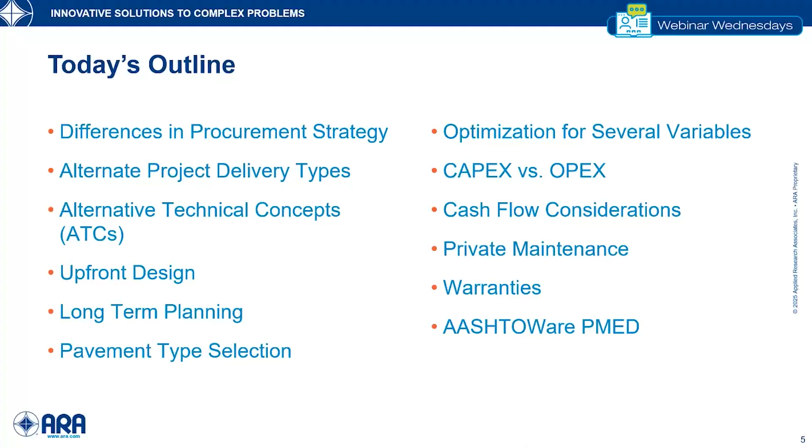We'll talk about the differences between CapEx and OpEx, or capital expenditures and operational expenditures. We'll talk through, related somewhat to CapEx and OpEx, cash flow considerations, privatized maintenance, warranties, and finally a couple of slides discussing and describing AASHTOWare's Pavement ME design software and how it can be used to help in these alternate delivery project type solutions. So here we go.

Key differences really between design bid build and alternate delivery, and that's kind of where we start. Key difference really is that the general contractor involvement happens a lot sooner in an alternate delivery environment. Traditionally, design bid build has been the mode that most DOTs have worked in. The risk is primarily sitting with that owner agency in the design bid build environment.

It follows those proven specifications and procedures, really encourages innovation through low bid procurement. So there is still innovation in design bid build. Our contractors are always looking for ways to deliver projects as competitively as they can. And so they are incentivized basically to do that through low bid procurement.

In alternative delivery, you get more opportunities for collaboration between the designers and the contractors, and really even the owner agencies. The risk can be shifted to the contractor. This can be sold as a benefit to taxpayers because the owner agency may not have to be responsible for something later down the road. Of course, that risk does translate to pricing, of course.

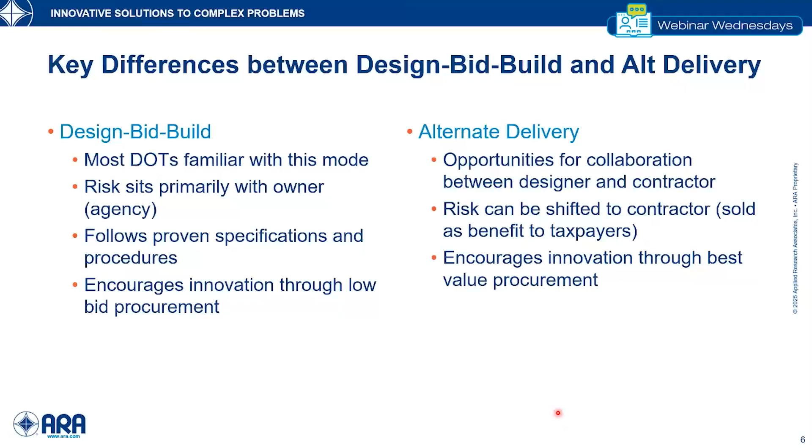And it encourages innovation through the best value procurement. So not only low bid, but better schedule, better availability potentially, innovative financing opportunities. There's a host of other benefits to those alternate delivery types.

And so there are many alternate project delivery types. Starting out with probably one of the more basic ones, just considered design build. But then more recently, we've seen the advent and increase in uptake in progressive design build, which I personally have enjoyed a lot because that particular project delivery type has your contractor-designer team selected based on qualifications, with much earlier interaction and really a teaming environment with the owner agency.

Public-private partnerships, where we start to see some private financing enter the picture. Then there's design-build-operate-maintain, and design-build-finance-operate-maintain—permutations of design-build and P3s. And then construction manager general contractor, construction manager at risk, and bridge and project bundling.

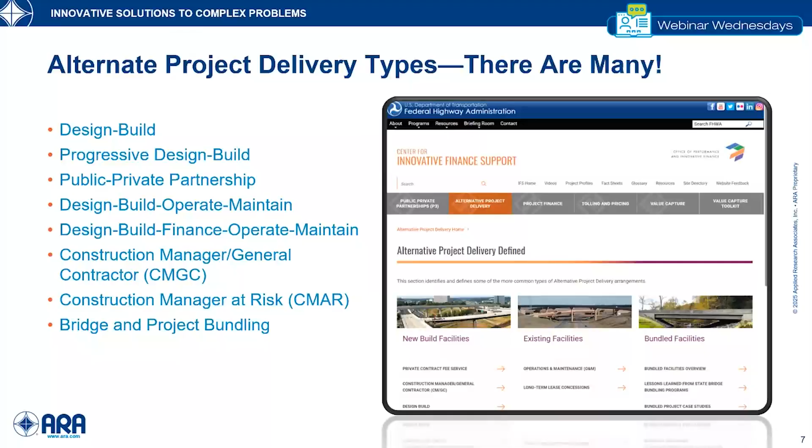As Shri mentioned during the intro, this is an evolving area with many agencies trying to come up with the best solutions for procurement for infrastructure delivery. We may see many more types of alternate project delivery in the future. I wholeheartedly agree that the FHWA Center for Innovative Finance Support is a great resource to provide definition and context for each of the alternate project delivery types, and will likely keep up with new ones added over time.

Next topic for today is the discussion on alternative technical concepts, or ATCs. I've personally found these to be a lot of fun in my career, and it's really one of the best opportunities for innovation. It is the idea of a concept offered by the competing team, delivering equal or better quality of finished product, and those ATCs are considered confidential.

They're one-on-one, submitted to and discussed with an owner agency. An owner agency can accept them with modifications, or reject them outright. One real benefit, which some competing teams may not enjoy, is that all ATCs become available to whoever is ultimately selected and awarded the project. So one team can't submit an idea that's approved for them but left on the cutting room floor if they're not selected. The owner agency benefits from all ATCs submitted and approved, getting the best of what all the contracting teams were trying to offer.

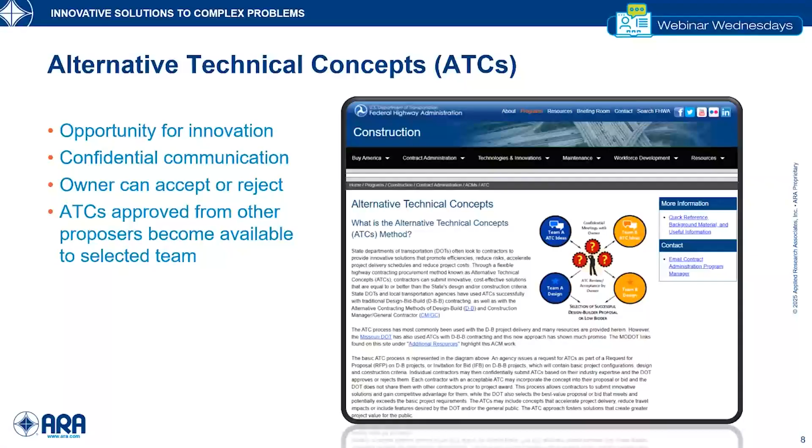I will say each agency offers these types of ground rules early in their procurement processes, and they are ever-evolving. This is a dynamic industry, and changes in specifications and best practices are constantly taking place. So it's good to be mindful of what the ground rules are.

Here's an example of an ATC process that I personally went through. I'm going to be scattering some examples throughout this briefing and webinar today of things I've encountered in my career, to demonstrate some interesting things that have come along.

The top left table represents a structural number calculation associated with an asphalt pavement design for a road in Tennessee, considered the base design. The ATC that a project team developed was attempting to remove the requirement for including a cement treated base in the pavement design, and instead take advantage of more of the in-place materials, substituting a lime stabilized soil to provide more support for that pavement section.

Back to the concept, ATCs must answer this question: does the concept deliver equal or better quality of finished product? This example shows how the contractor innovated to use as much in-situ base material as possible. The base design called for removal of an existing concrete pavement and underlying granular base material, replacing it with 8 inches of new aggregate base, of which the top 4 inches would be cement treated. The design-build team proposed the ATC to instead windrow the existing aggregate base material, lime stabilize the underlying subgrade soil, and replace the aggregate in place.

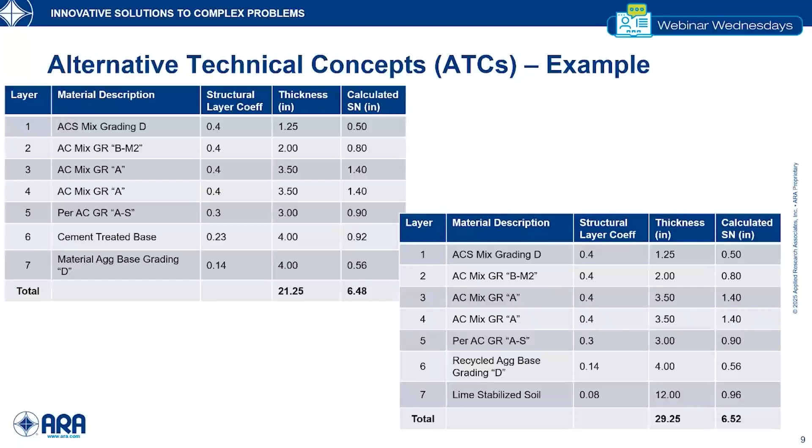And the solution would reduce haul off and import of material and provided a higher final structural number than the base design. So, just an example of ways to innovate with pavement design through the ATC process.

Upfront or base design is really where all these projects start. It truly does depend on the alternate delivery procurement at hand as to how far along the design is when it's handed over to the competition teams. In progressive design build, it may only go as far as about 10% concept design, because progressive design build is intended to be a partnership between the owner agency and the contractor joint venture team. In a traditional design build, it may go all the way out to 30% design. In P3s, it can vary wildly from low percentage upfront concept designs all the way to more finished designs, anywhere in between.

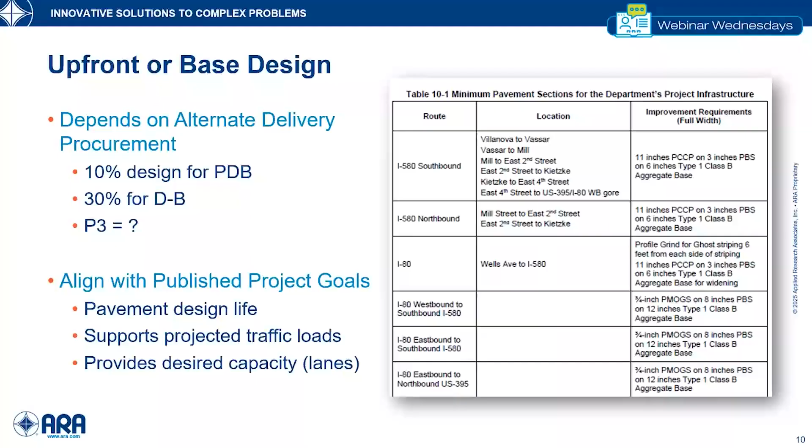But those base designs really do align with the published project goals. They will describe and declare the desired pavement design life, show and highlight how they can support the projected traffic loads, and provide the desired capacity, typically described as number of lanes for that project. The table shown here is an example from the Spaghetti Bowl Express interchange in Nevada, showing the different routes and road segments and what is intended with the base design for each. Performance criteria can be established, and depending on pavement type, there are opportunities to define what those performance criteria are.

If an initial design is not specified, an agency can instead develop performance criteria against which alternate designs are compared. So rather than specifying a jointed plain concrete pavement for an infrastructure project, they can allow pursuit teams to offer their best solutions for pavement type and performance, with guidance on the performance criteria that each pavement type would need to meet over the performance period of the project.

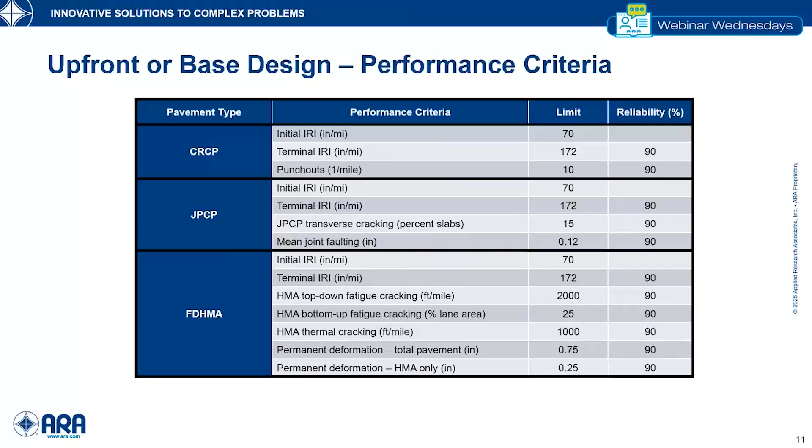Oftentimes with upfront and base design, one of the biggest questions is to understand what is already there. Very few opportunities exist for greenfield design. Most projects are considered brownfield, meaning there is existing infrastructure of some sort of pavement already there, which typically needs to be increased in capacity or moved or realigned slightly to accommodate geometry changes associated with the increase in capacity, or what have you.

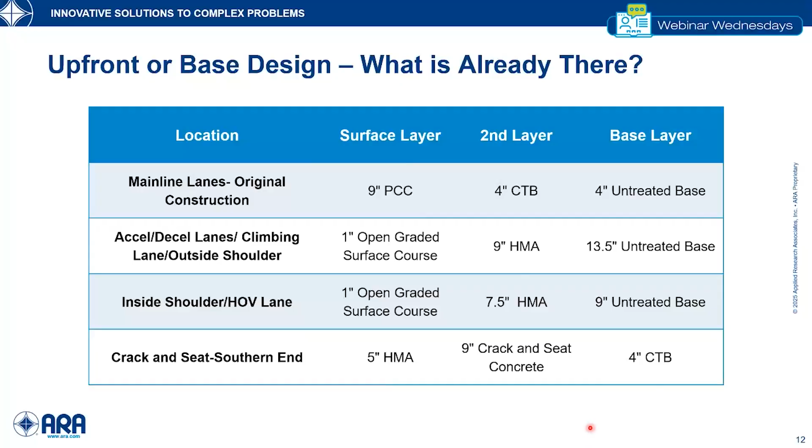Falling weight deflectometers and heavyweight deflectometers for understanding structural capacity measurements and structural integrity. The LCMS and 3D laser-based digital survey vehicles for collecting distress information, and right-of-way camera imagery for understanding how the roadway fits into the overall geometry of the corridor. High-speed profilers measuring the smoothness of the roadway, be it concrete or asphalt.

Friction testing devices help us understand the frictional characteristics of current surfaces. Many of these projects do require resurfacing, but it's good to understand the frictional characteristics of the existing pavement and materials to have a good sense of how that may project into the future with a new surface.

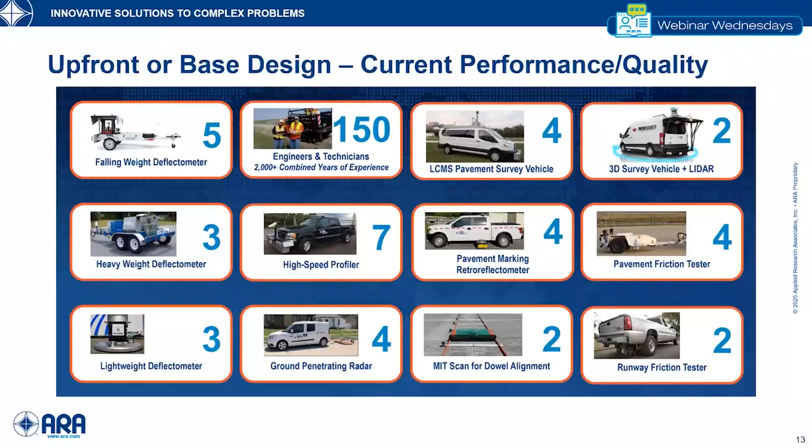There's a host of ways to do non-destructive testing to gain data and information on what is currently there, and data helps drive great decisions. We absolutely need to understand the best we can what is there today to best project how we can work with it and make something valuable for the future.

In this case, a level 1 design exception where the proposed mainline inside shoulder is less than 12 feet wide, which did not meet their original requirement, and a level 2 exception, how the existing equivalent length of grade exceeds the critical length of grade between two of the cross streets.

This informs the pursuit teams on design exceptions that are currently present, offering them opportunities to potentially solve those challenges, to remove the design exceptions, or to pursue further with the exceptions, and describe how the ultimate infrastructure alignment and design will still provide a safe travel environment, not missing out on the opportunity to keep it safe.

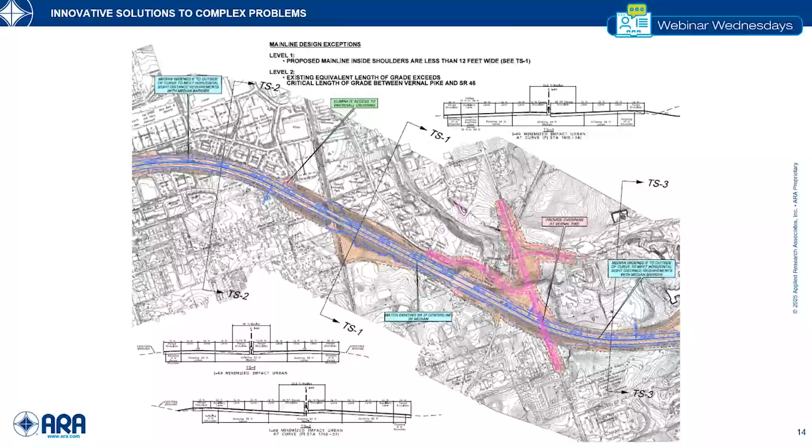Now we'll talk a little bit about long-term planning. When you embark on an infrastructure procurement project, it is always good to have the long term in mind: where is this project today, and how are we making it better for the future?

So what is the design life for that project? Specifically with regard to pavement, that can be declared to be 20 years, 30 years, 50 years, depending on the type of procurement and the ultimate goals of the owner agency.

How much traffic is it going to support? Are there multi-use corridors being incorporated as part of that design? Sometimes there's right-of-way planned for public transit, be it bus or even rail systems. Sometimes bike lanes are being considered as part of the corridor enhancements. And then revenue projections, if that is part of a public-private partnership opportunity.

Specifically with regard to pavements, talking about long-term planning, what is the ultimate desired capacity for a project? What kind of lane availability will ultimately be there, and what liquidated damages may be applied if lanes are not available for whatever reason.

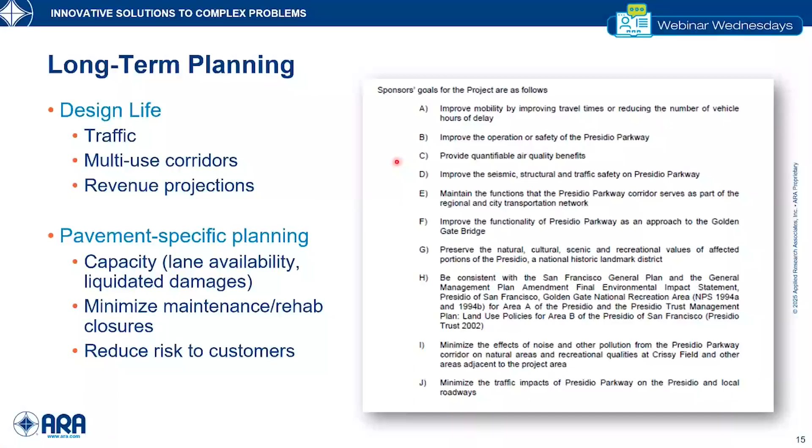The example list of sponsor goals shown here is from the Presidio Parkway design, build, finance, operate, maintain project from several years ago in San Francisco, where you can see a description of the high-level goals for the project: improving mobility, improving operational safety, and quantifiable air quality benefits. There's a number of ways to describe the long-term goals of the project.

So after the operation and maintenance period that the private concessionaire would undertake, there would be at least 10 years before the owner agency would need to do something to restore service life to the pavement. So in order to ensure at least a minimum of 10-year residual life, there was a requirement for inspections to take place, including up into the handback timeframe.

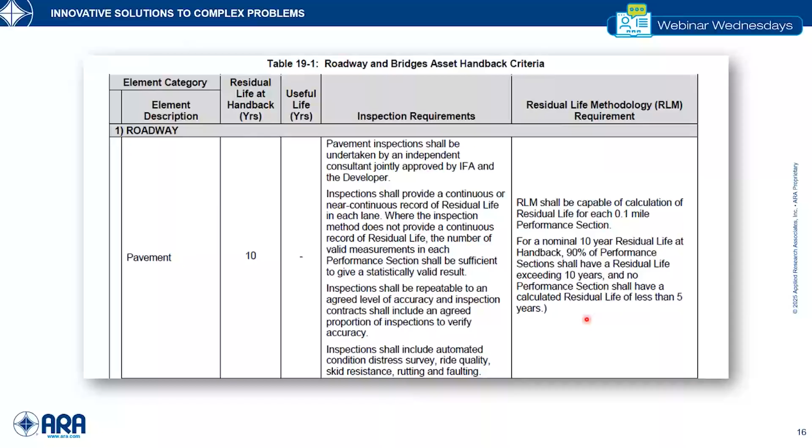So this is something that all of these pursuits really take into account, that exchange of risk for financing. All right, now we're going to move into pavement type selection.

This can be a hot topic associated with the continued great competition between our really two primary pavement industries, being concrete and asphalt pavements. How do we get to the appropriate or best fit pavement type for a project?

This process is often done in concert with a life cycle cost analysis, but may include other factors. NCHRP Report 703, the Guide for Pavement Type Selection, really does a great job of mapping the process for selecting the pavement type for a project.

It goes through these major steps: the identification of feasible alternatives. You may reduce or eliminate some alternatives because they're deemed not feasible for one reason or another. Then you develop pavement life cycle strategies and get into a life cycle cost analysis of those strategies. If there are economic or non-economic factors, they can be evaluated and weighed accordingly.

Then an agency-based selection of preferred pavement type can be done, ultimately moved to the design bid build preferred pavement type. That is the typical or traditional agency-based pavement type selection process that results in a design bid build procurement. The alternate delivery process can intercept this process to allow for different pavement types to be chosen based on the results of this selection process.

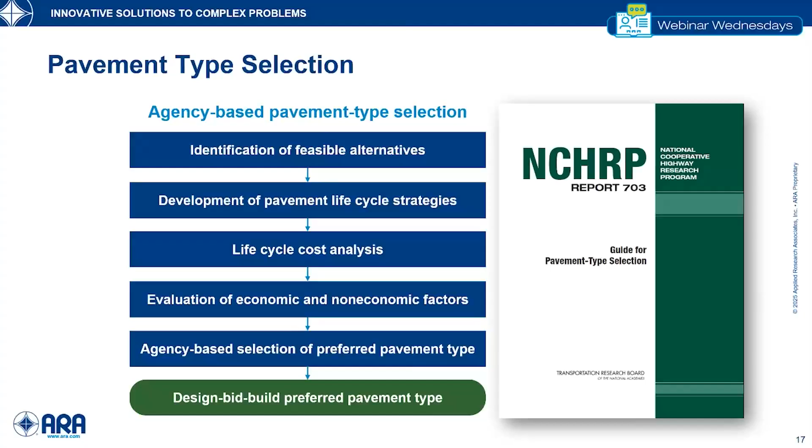If you do have non-economic factors, one way you can work that into the pavement type selection process is with the establishment of grade cards. Really, that's nothing more than, think of your grade report card you would get going to school. Each criterion would get a letter grade.

In the example I'm going to walk through, this is from the Illinois Tollway procurement of one of their main corridors, where they underwent a pavement type selection process that included both economic and non-economic factors. These were the factors being considered: the initial or upfront construction cost, the ongoing maintenance cost, a green or recycling factor associated with each of the pavement types, and a constructability and schedule factor.

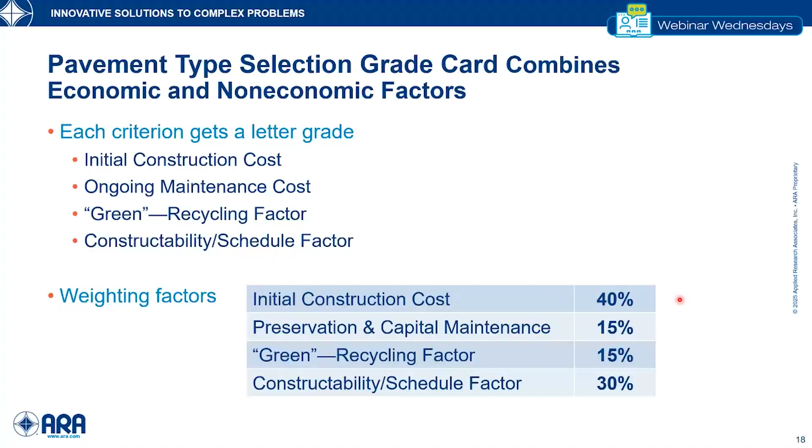The weighting factors associated with each of those criteria were determined through a panel of Illinois Tollway specialists and staff, to describe what was most important to them for the ultimate, long-term goals of the project.

So when the pavement type selection was completed, the 5 options for pavement types are shown across each of the 4 main criteria we just described: construction costs, capital preservation (also considered operations and maintenance cost), a green or recycling component, and a constructability and schedule factor.

Each of the pavement types had positives and negatives associated with different aspects of their construction. You can see where an A was given to the lowest construction cost associated with upfront costs. In this case, full depth asphalt worked out to be the lowest upfront.

In capital preservation, an A grade was given to the lowest long-term preservation cost, and that was deemed to be continuously reinforced concrete. On the green side, an A grade was given to the greenest alternative, based on criteria associated with the reuse of existing pavement or amount of recycling permitted. This grade was a consensus from the engineering group with the tollway.

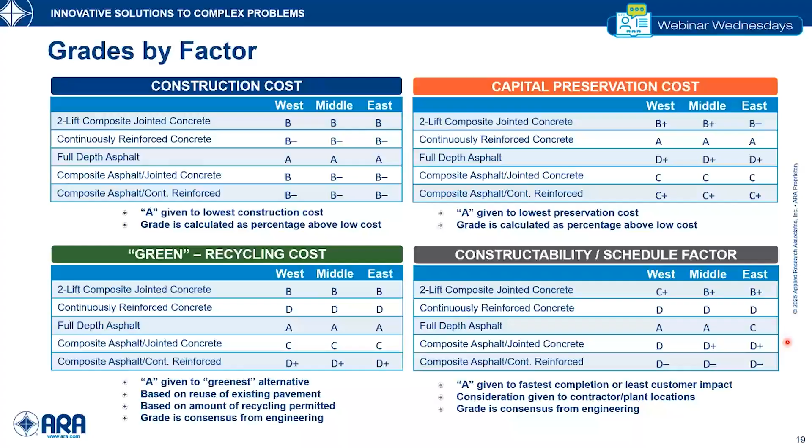Then there's the constructability and schedule factor: how quickly could the project be delivered? The west, middle, and east are portions of the corridor that was ultimately being constructed, so there were different challenges associated with geography along the corridor. You can see where the schedule was challenging on the eastern end of the project, which had to do with the forecast of where asphalt could or may not be efficiently delivered to a project, and you can see where the letter grade had changed there. That was an interesting experience to go through with that pavement type selection.

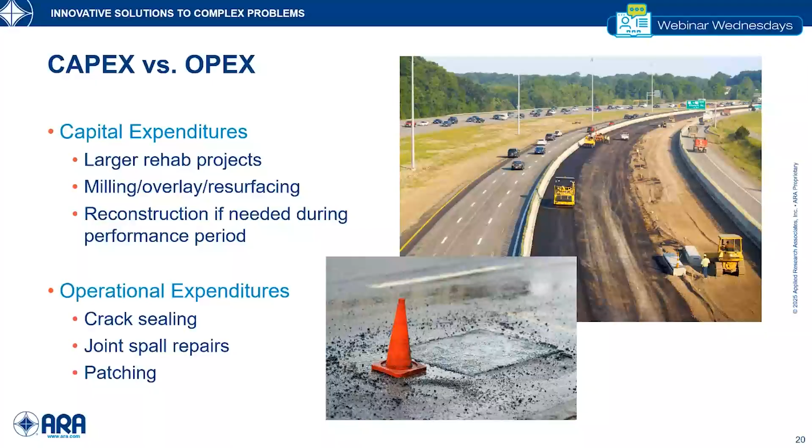We'll move now to a discussion between CapEx and OpEx. Capital expenditures are your larger rehabilitation projects: milling, overlay, resurfacing, reconstruction if needed during the performance period. Depending on the length of time your pavement is expected to be performing, you may or may not encounter the need to reconstruct it. Operational expenditures are more of your annual type repair strategies, like smaller items such as crack sealing, joint spall repairs, or small patching quantities.

So there are cash flow considerations associated with that, especially for P3 and toll facilities. In these cases, especially with P3s, the upfront bid is the high bid. Contrary to typical procurement where low bid is considered the winning option, in the case of P3s, owner agencies are looking for the most return on their investment, and therefore the highest upfront bid is selected. So the P3, in turn, would like to defer expenditures to recover that upfront cash outlay. If you think about putting up a lot of money up front, you'd really like some time before having to put additional money into reinforcing or supporting that infrastructure. So how can the pavement designs accommodate that strategy?

You look for pavement solutions that have a lower CapEx upfront, so potentially doing work right at the beginning or just before the project were to take place, or how do you defer for some amount of time, still maintaining the performance requirements associated with that pavement, but gearing up really in recapturing cash flow to be ready for more construction to take place after the first, say, 10 years of that procurement timeframe.

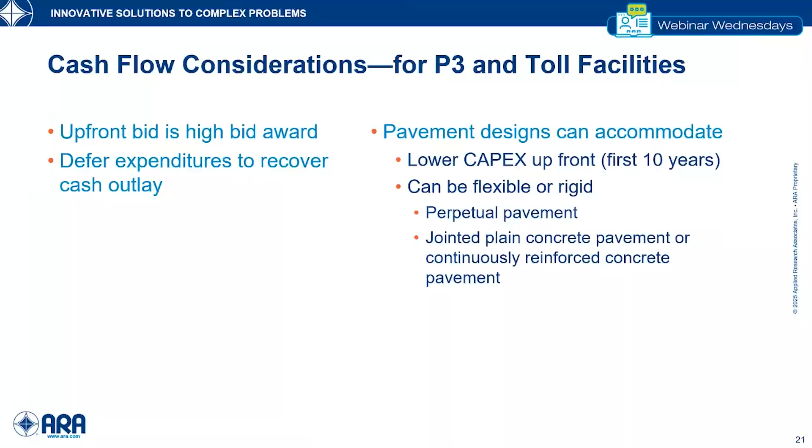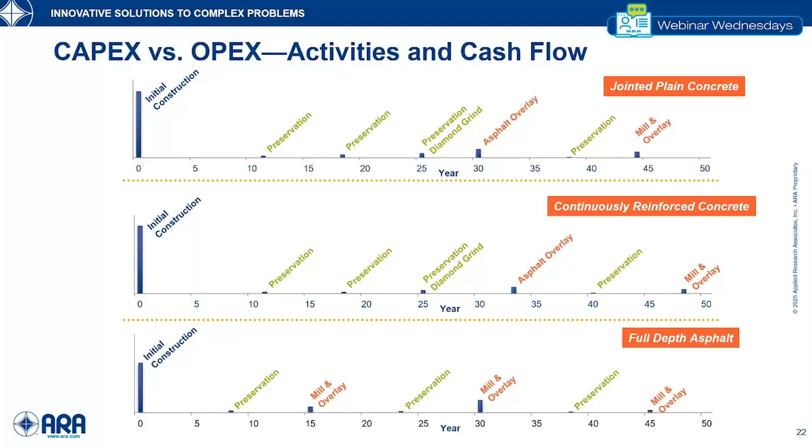So the preservation activities are more of those OpEx type activities: crack seals, surface treatments, diamond grinding, even some patching. But the overlays and the mill and overlay cycles are more significant and usually considered part of the CapEx strategy. In life cycle cost analysis, you will see how this is all racked and stacked. They bring all the cost streams to the same dollar value, considering time value of money, typically presented as part of equivalent uniform annual cost or net present value.

Typically, when you're doing a life cycle cost analysis, and this is agency dependent, but there is usually guidance somewhere in the neighborhood of 10 to even 15%, where if costs of alternatives are within that range of one another, they're considered close enough or equivalent on a cost basis, and it allows the agency to ultimately select the choice that they would like.

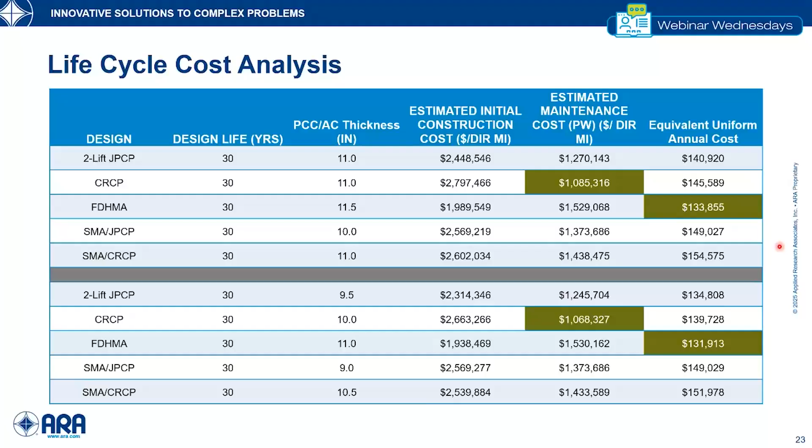We'll talk a little here about private and privatized maintenance. With regard to these infrastructure projects and P3s or design, build, operate, maintain projects, it removes that maintenance burden from the owner. The owner benefits from a lower requirement for investment in personnel and equipment over time, and pushes accountability and quality assurance onto that private maintenance group. The operator benefits from increased revenue or bid value because they support the maintenance of those projects over time, and it may allow for innovations or efficiencies the owner agency may not have been able to provide internally.

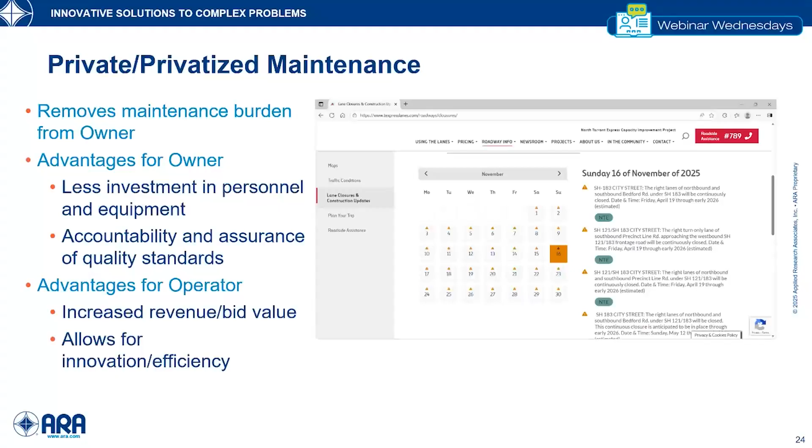Warranties are a more recent development, and are becoming more accessible due to confidence in future pavement performance prediction. As we get better at predicting performance, we can feel more confident about offering warranties, or as an agency asking for a warranty to say we expect this pavement to perform over a period of time, and we want you to stand by it.

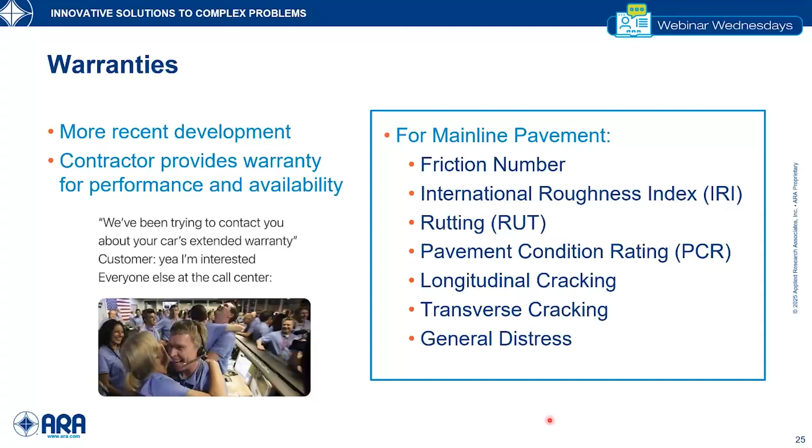The right-hand bullet group comes from a 7-year warranty on an Indiana toll road project, where the owner agency wanted friction, IRI, rut measurement, PCR rating, longitudinal and transverse cracking, and general distresses to all be warranted for 7 years after initial construction. That then played into the contractor's bid opportunity to understand how they might design and build their pavements to have the best chance of providing and exceeding these warranty requirements. So, another innovative option there.

I wanted to spend the last couple of slides talking about the AASHTOWare Pavement ME design software. I feel very strongly that this is one of the best tools for modeling pavement performance I've ever seen. It's used in more than 40 states and over 20 international countries, and is being adopted more every day, which I love to see. It allows for custom inputs for infrastructure projects, where each site has the opportunity to receive a design that is tailor made for it.

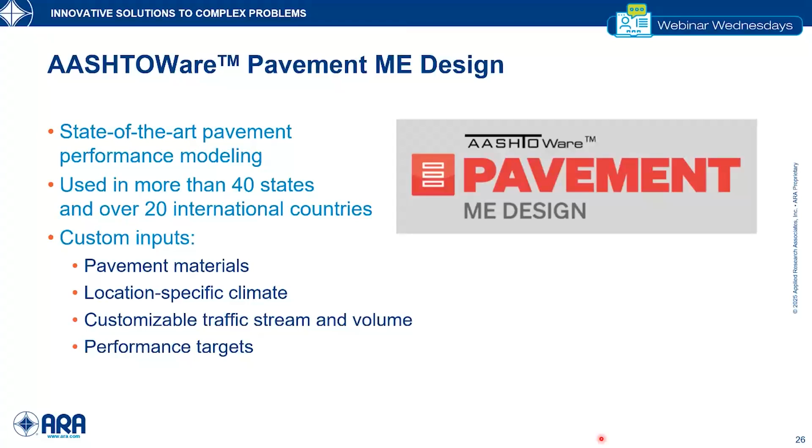It includes opportunities to customize pavement materials, location-specific climate files and data associated with that location, customizable traffic streams and volumes for that area of infrastructure, and performance targets, like we talked about earlier. This really gives an opportunity to move into the real 21st century, where designs aren't just based on extrapolations from the AASHO road test, but take advantage of more than 50 years of real valuable pavement research done by universities and consultants across the world to understand pavement performance over time.

This gives you an idea of how you can set up a project and input performance targets. You can run sensitivity analyses to understand the criticality of each variable that's part of your pavement solution. The software will then predict how much of each distress will accumulate and when it will happen.

In this case shown on screen, the IRI is shown to fail before the 20-year design life. Twenty years was determined to be the design life we'd analyze for, and we're showing an accumulation of IRI beyond the acceptable target. All the rest of the structural and performance criteria are shown to pass. But in this case, the pavement strategy accompanying this design did meet the requirements because there was a targeted overlay as a handback requirement at year 12 of the 20 years.

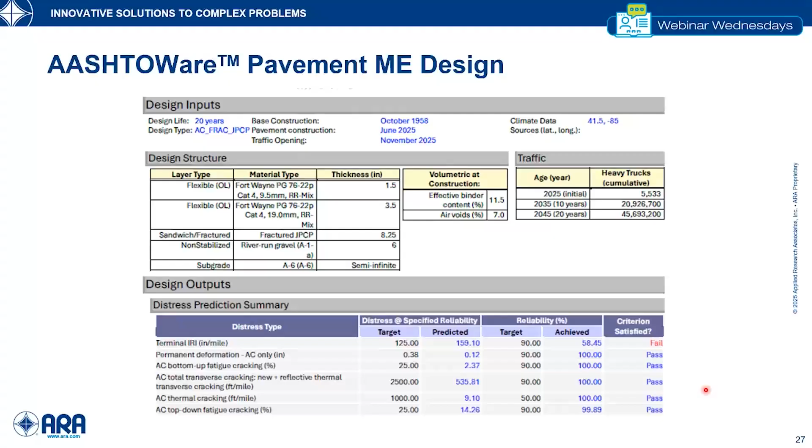The desired design here was a 20-year structural design with a minimum 12-year performance requirement for the surface. This IRI was shown to not meet the full 20 years, but we'll see here that it actually did meet the 12-year requirement.

One of the neat opportunities with Pavement ME design is the ability to check specific variables against base design criteria. What I've shown here is the initial IRI in the base design, which is the default value associated with Pavement ME design of 63 inches per mile, an aggregated average with contractor performance. However, the contractor pursuing this project was confident they could deliver an initial smoothness of 50 inches per mile and was pledging that as part of their bid.

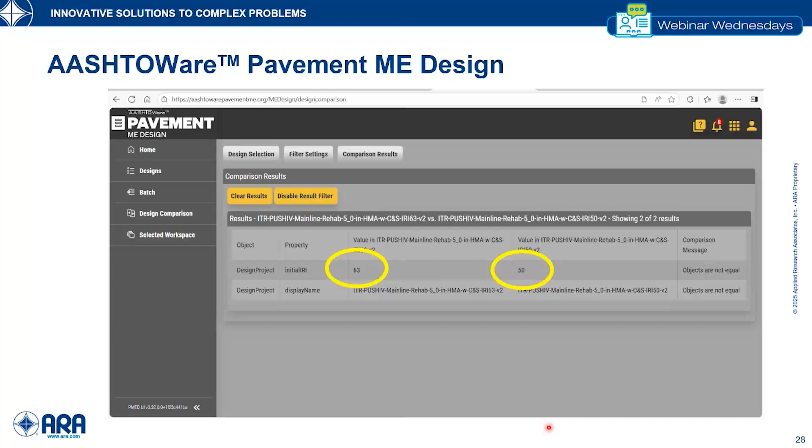The change associated with that initial IRI in the base design showed IRI failing at year 10, which did not meet the handback requirement of an overlay at year 12. But the initial IRI of 50 inches per mile moved the time at which IRI would exceed the performance criteria out to a projected year 14 and a half. That meant the contractor would feel confident they'd get all 12 years of performance before the targeted overlay with the structural pavement design they provided.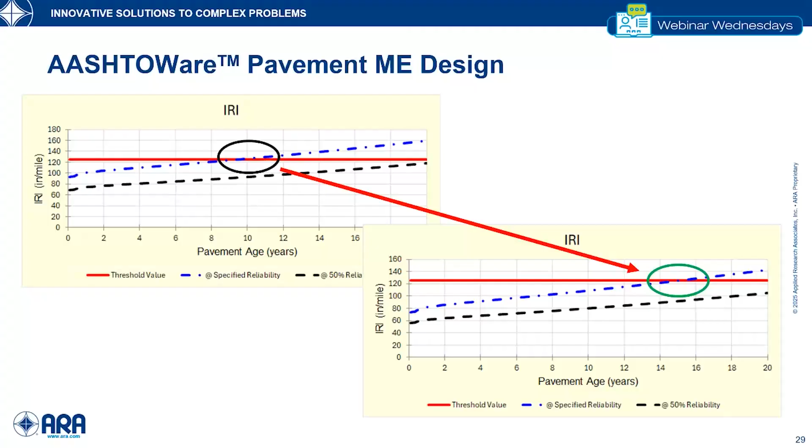So by utilizing the contractor's quality data, it supported innovative design and paving smoother upfront. It bought them time to the next rehabilitation.

My last slide is a shout out to AASHTOWare, to describe that there are a ton of videos on their site showing really how to use their state-of-the-art tool, Pavement ME Design, and its number of modules. I encourage anybody in this field not familiar with these videos to go out to the YouTube site and take a look at those modules to really get up to speed on how to utilize Pavement ME to the best of its abilities.